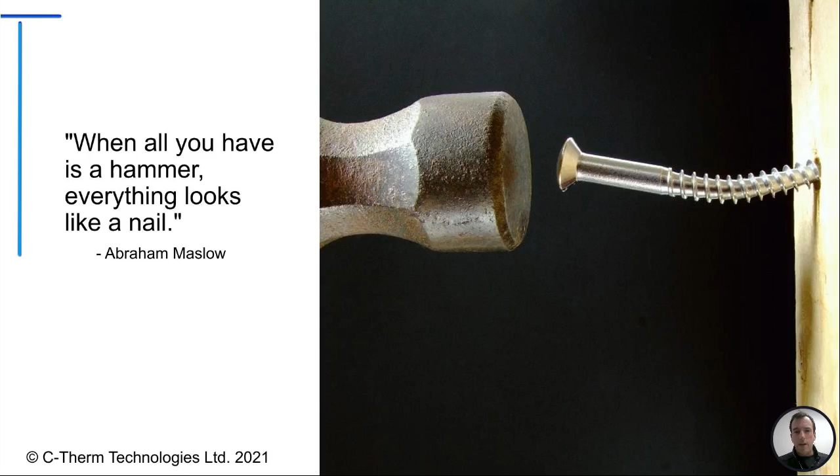There are a wide range of different materials: solids, liquids, powders, pastes, conductive materials, insulative materials, and different environments you might want to test under: high pressure, high humidity, radiated environments in the nuclear sector. And it's really important to have a variety of tools so you can have a tool that's appropriate for the job at hand. And with this, Trident brings those three different sensor types.

This slide just gives you a good idea of what the relative sizes are of the sensor. And what we're identifying here is the active area of the sensor. So this would be the area that would need to be covered by the sample material. On the top, you've got the needle probe, which has an active length to it of 150 millimeters, and that gets immersed into the media which you're looking to test.

This can be good for granular material if you're looking at soils or different granular geological material for site selection, perhaps for geothermal application. This can be a good tool for that particular type of application. We don't talk a lot about it in this content, but there are some interesting areas of applicability there related to soil testing. Also great for polymer melts and really sticky bonding materials that might damage the other sensors. It's our most robust sensor.

The middle one is the Flex TPS, and that has multiple size sensors. So that's one thing to note, is with the Flex TPS, you do get that variety of sensor sizes. Depending on the heterogeneity, the homogeneity of the material, what the application is, your evaluated volume of material, you might have some important considerations there. You might want a larger evaluated volume of material, proportional to your measurement. So with the Flex TPS, you have 6, 13, and 30 millimeter sensors provided as default with the Trident Flex TPS offering. So you get those 3 sensors in those sizes available with it.

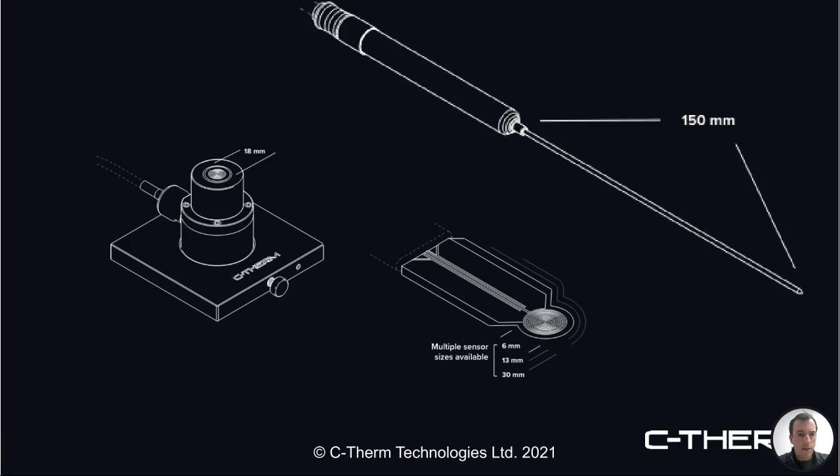With MTPS, this is used in, I would say, 75% of the application area. So it is the most popular sensor. It's the most sensitive, has the best precision, reproducibility, and accuracy in most situations. Being a single-sided sensor, it's really easy to operate. It's factory calibrated, plug and play. It makes for a really simple user experience. You'll see this used a lot. Because it's single-sided, you can thermally map different areas of a composite. So if you do have some difference in performance, perhaps some settling in a composite that you'd like to investigate, the MTPS is a great tool for looking at some of those particular issues.

These are some accessories available for the MTPS. So the top left, you see the powder test cell. Top right is the high pressure cell. We have a line of high pressure cells available for the MTPS. Lower left is the same cell that's used for powders, except in this case, it's being used for liquids. There is an O-ring that's on the bottom of that, makes it easy to test different liquids, very versatile. And then to the right is a great tool for dealing with any kind of compressible material.

Something you want to think about if your material is compressible is that any densification of a material will typically impact its effective thermal conductivity. So if you think of, for example, an insulating batting material, when it's nice and lofted, you've got a lot of interstitial air present in that. Air, when it's not moving, is a great insulator. It's around 0.023 watts per meter Kelvin. So this is a great means of lowering the conductivity, improving the R value or insulation quality of a material.

But you really want to make sure that you're testing that material with a representative level of compression. So depending on how compressed that material is going to be in the application, that's what you would want to represent and reproduce with the CTA pictured on the right. And that device just provides a really sensitive way of dialing that in reproducibly. It's a nicely designed compression test accessory.

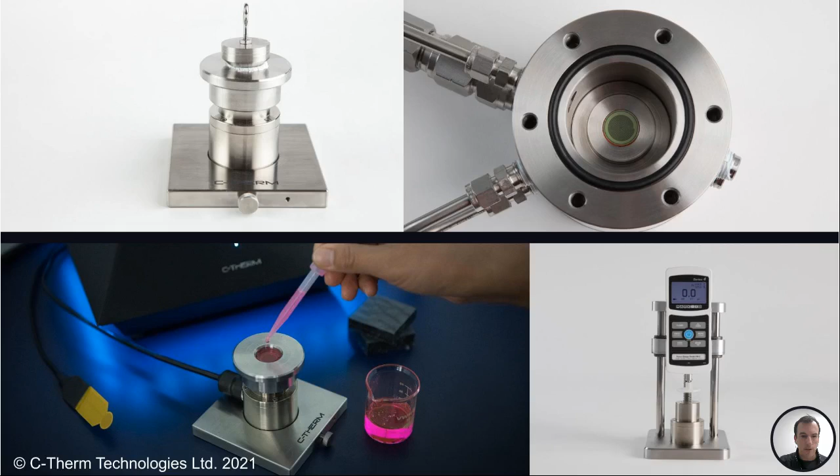With TPS, Flex TPS, we have a variety of other accessories and options. The TPS sample clamp is used in a lot of testing. It's one of the ways we negate the impact of contact resistance with testing with TPS.

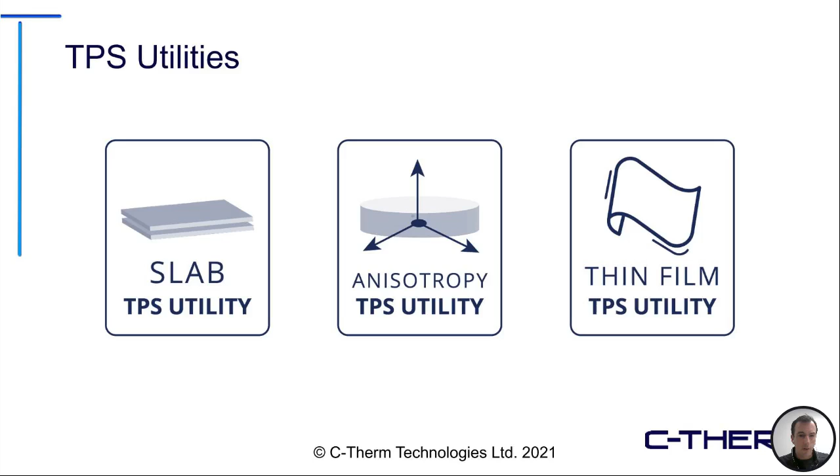There's a lot of information being presented here, and what we're trying to educate and advocate within this kind of space on is the pros and cons of these different techniques and methods. And so all the methods are good. They all have their merits. They all have their limitations as well. And what we really try to focus on is speaking and informing the audience on what those capabilities and limitations are. What are the particular applications where we recommend certain types of sensors and certain types of solutions?

This is all codified in the method selection guide that was produced a couple of years ago by folks from our team and external experts in thermal analysis. It's a comprehensive document. It's about 50 pages. And what it really does is explains thermal conductivity methods, not just the transient methods that we're focusing on today, but also including steady state techniques, such as guarded hot plate, and techniques that are most suitable for really high temperature ranges, like laser flash. If you've got to test at 1,000 degrees Celsius, then laser flash is a great solution for that.

But laser flash brings a lot of other requirements along with it, including the need for heat capacity, the thermal expansion of the material, etc. So it's really important to understand the points of theory that support the method, and what are the practical limitations of it when you go to measure different types of materials. Lots of methods can be adapted for different scenarios, but it doesn't mean that they're necessarily optimal for testing these different types of materials.

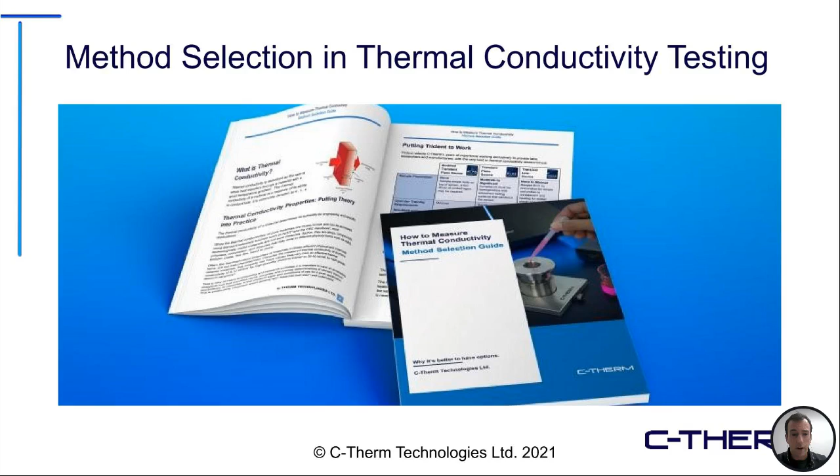I also want to just mention, I'm going to transition this over to Ari in just one or two more slides, but we've got a couple of cooperation partners that are a really strong part of what we do. We work closely with a couple of French organizations that are leaders in their respective fields.

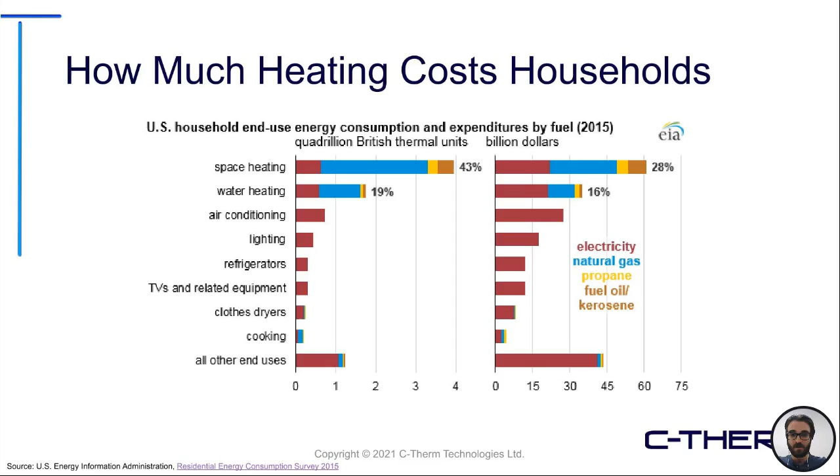One of the main driving factors behind a lot of these innovations is obviously related to the cost of heating and maintaining ideal living temperatures inside of these buildings and houses. You can see just from this example here, the sheer amount of energy that's required to maintain heating, whether that's the inside, your water, air conditioning. It's an extremely large amount of our resources, which translates to billions of dollars on a yearly basis to perform and maintain this cost.

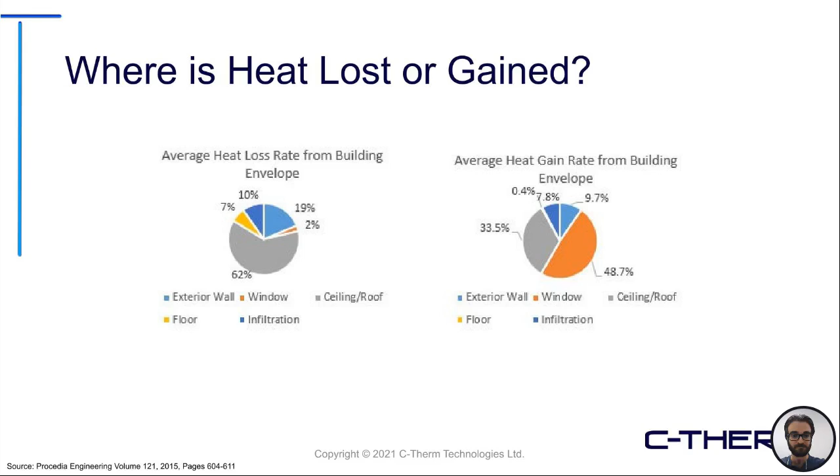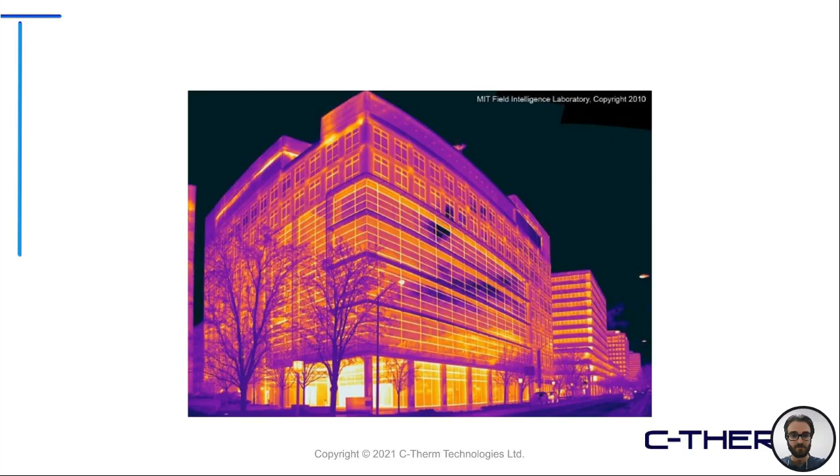Here we just see an IR image of a building. Obviously, noticing that there are quite a range of hot spots and cold spots throughout. This is related to the different areas of the building, height-wise, what material the building component is made out of, whether it's a structural, thicker material, a window. Buildings encompass quite a wide range of materials and components, so there's a lot of factors to consider here.

But all of this is going to be coming back and relating to thermal conductivity. This is what we're going to be exclusively focusing on during our presentation here today. Obviously, there's a lot of aspects to an ideal building material that need to be considered, whether that's the structural, mechanical properties of that sample, how efficient that material is. Cost is obviously a big factor, but with respect to efficiency and the temperature maintenance capabilities, this is where we're going to draw thermal conductivity information from.

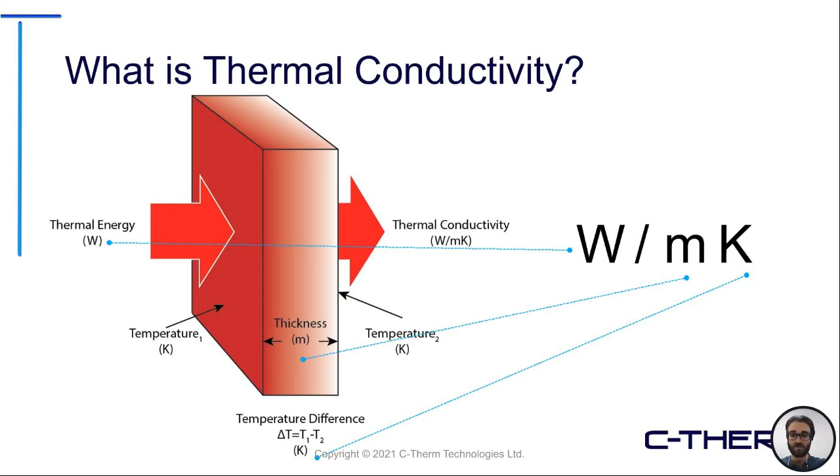So just breaking it down here, for those who may not be familiar, thermal conductivity can be seen as essentially the amount of thermal energy, so watts, traveling through a given material thickness, so meters, across a temperature gradient K. So thermal conductivity can be reported in watts per meter Kelvin, and this is what we will be going over and discussing today.

So as I mentioned earlier, buildings can encompass quite a range of structural components and different material types. Whether it's residential or industrial buildings, they all carry a similar overall format. Obviously, you have your base. These can include different types of foundations or slabs. There's the structural backbone or the skeleton, whether that's made out of metal beams or wood, depending on the type of building. And then you have your exterior, the extremities, so the roofing, the walls, flooring. Inside of all that, there's insulation. So a lot of different components to consider here, and again, a wide range of materials.

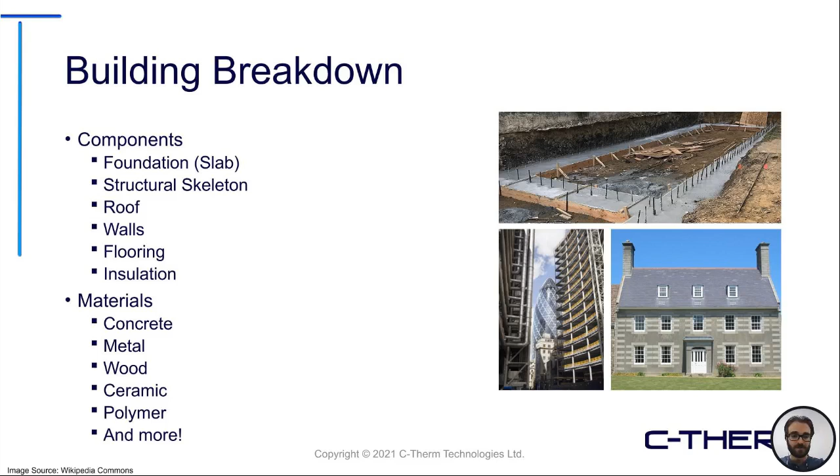You can have porous concretes, you can have dense metals, woods, ceramics, polymers. Really, building materials are a very hard application space to group into one little box; they incorporate quite a range of material types. And because of that, the focus in the coming slides will be a lot of different case highlights and applications, looking at how thermal conductivity is being used to help improve or quantify the effect for the different material components and structural aspects of the buildings.

So with that, we'll start jumping into some specific case highlights. First off, we will be looking at some studies that involved using the modified transient plane source, or MTPS sensor, for the thermal characterization. Touching on it just a little bit from what Adam had said earlier, the MTPS is the single-sided sensor, really easiest to operate and use, and offers some of the widest versatility with respect to the samples you can test: high conductivity, low conductivity, solids, liquids, powders, pastes.

Really incorporates a vast range of samples. And the other thing, and this can be really influential for the building materials as well, is taking a look at being able to test in those representative conditions, whether the building or the environment that the structure is in, whether it's a warm climate, cool climate, underground, above ground. These can all be factors that should be considered.

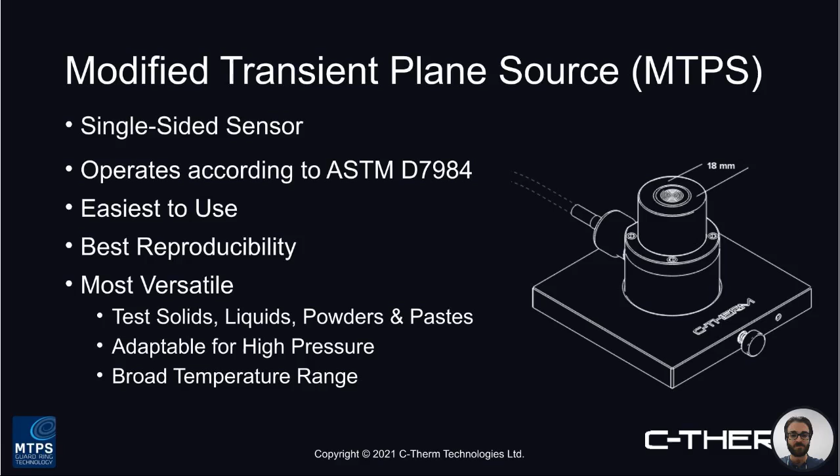And when you're going to test the thermal performance of those materials, really being able to mimic those conditions is going to be crucial to getting the best overall understanding of how that material will end up performing in its end use scenario.

So starting out, we have a study that was done on thermal parameters of roofing slates from the Czech Republic. So in this study, we'll take a look at researchers that were aiming to investigate the effect of different natural mineral sources as roofing slates, or the material that's incorporated in the roofs. You can see on the right there the areas where the minerals were extracted from. So obviously different locations, different mineral compositions will all lead to different thermal performances.

And in this study, the researchers were interested in examining both in-plane and through-plane thermal properties, as well as seeing how the overall parameters were influenced by the effect of temperature. Some more notes from the study: the mineral composition was measured by XRD, but the thermal properties were all measured using C-Therm's MTPS sensor.

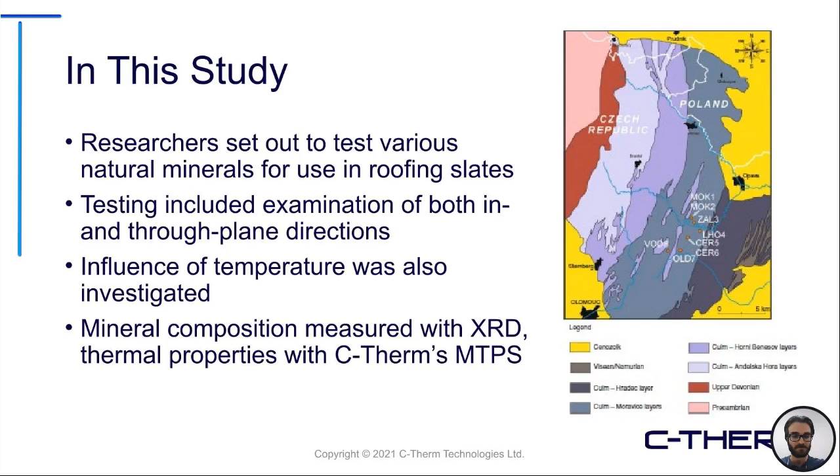So you can see here from the thermal conductivity results, they noted both the parallel or in-plane and perpendicular through-plane directions. And across all the various mineral sources, we did see, generally speaking, the parallel or in-plane did result in a higher thermal conductivity measurement compared to the through-plane direction.

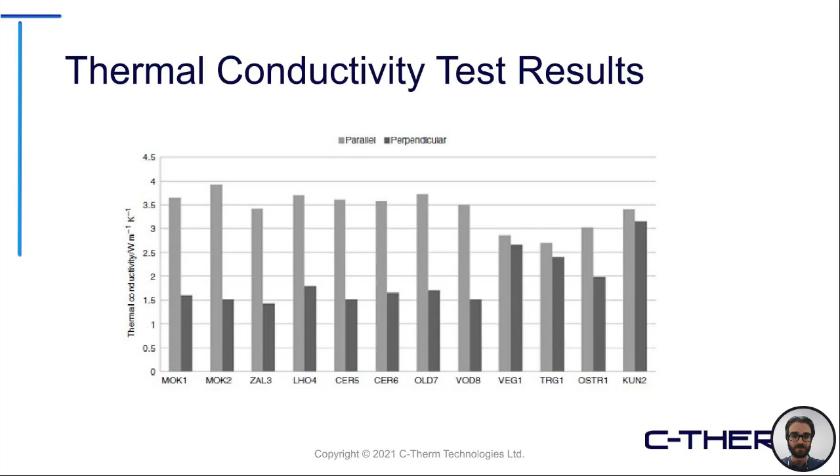Now, obviously, this is specific to the subsection of mineral materials that they were looking at, but it is interesting, and something worth noting, that some materials can have significantly different thermal properties and thermal performance in different directions. So this can have bearing on how you're aligning the materials during the construction, how they're incorporated into the materials, if it's an additive. All of this can come into play when evaluating the overall material performance.

So whether the roofs were in a shaded area or exposed to the open sun in non-shaded areas, these different materials can have different performances based on the temperature that you're subjecting them to, which will in turn influence their insulative performance as a roofing material.

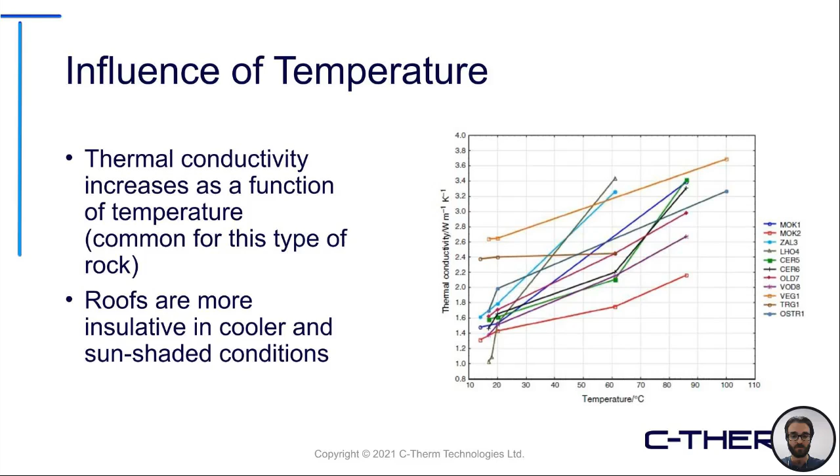Up next, this study, an experimental study on the thermal performance of phase change materials and wood plastic composites for building roofs. So again, we're looking at an application for roofing materials, but in this study we're touching on some of the next generation advancements in these classical building materials, incorporating the use of a phase change material. So you may have seen phase change materials mentioned if you've ever seen talks on thermal management in batteries and various technological devices. But we're seeing here phase change materials being included in building materials as well.

So in this study, they were aiming to add the PCM to the composite for their roofing applications. And the reason behind this is the phase change material will generally improve the temperature stability of a system when the thermal input is delivered to the sample that contains the PCM. That material will undergo what's known as a phase change, changing from either solid to liquid or liquid to solid, depending on the direction of that temperature gradient. And this can act almost as a buffer, enabling stability in the temperature change for the overall material.

Now, thermal conductivity data from this study was actually used by the group for some computational simulations. This is another big area where you can do some initial testing of the various materials, get your input parameters, and then instead of needing to build an entire structure and do the in situ testing, taking that data and running computational simulations is a way to get around going all the way to that end product, and can really be used to tailor and fine tune your parameters before moving on.

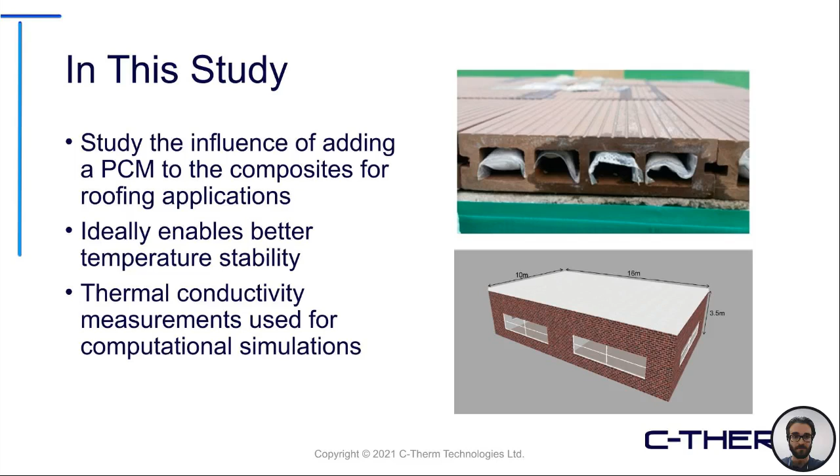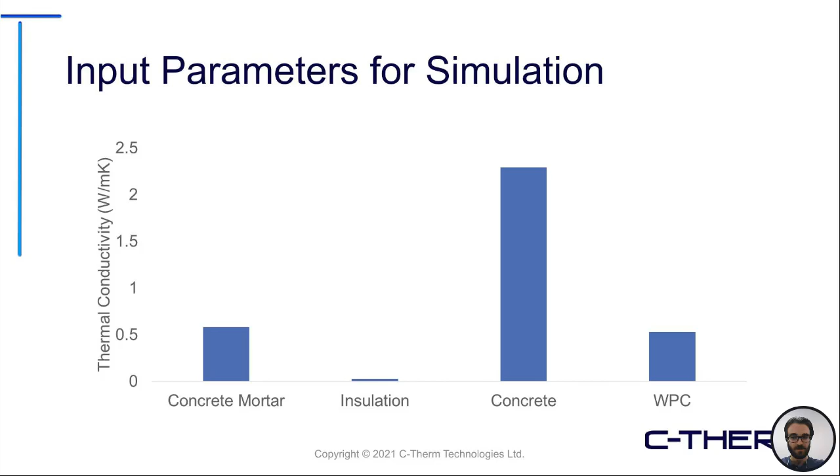So they had some material measurements with the MTPS, others were just reference values directly inputted, but you can see there's different materials that were incorporated in their study, some concrete, insulation, and then the different polymer-based phase change materials, all seeing quite a range of different thermal conductivities. And this is what they were using for inputting into their simulation study.

And what they're aiming to do is see the influence of the material with and without the phase change material and with different phase change materials on how well it would be able to handle a direct input of solar radiation, or essentially the delivery of that thermal input.

So we can see in general here, the overall temperature rise in the sample as a response to that radiation was generally seen to be higher in the samples that contained no PCM, and overall were somewhat lower with the various PCMs added. And again, this is what we would expect to see. The PCM is coming in there as a stability device, aiming to reduce the overall increase that was observed in the wood plastic composite.

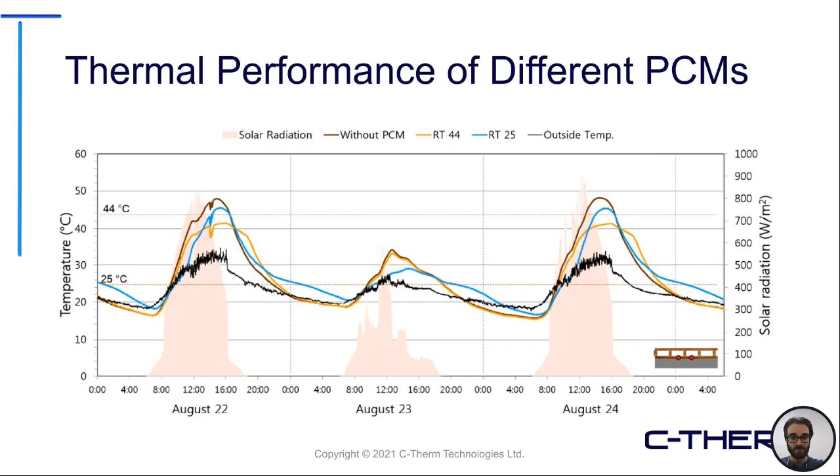With that, they're able to do some studies on the overall energy consumption that would have been used. Again, kind of tying back to one of the main purposes behind some of these studies, coming back to the energy consumption and the cost of living to maintain.

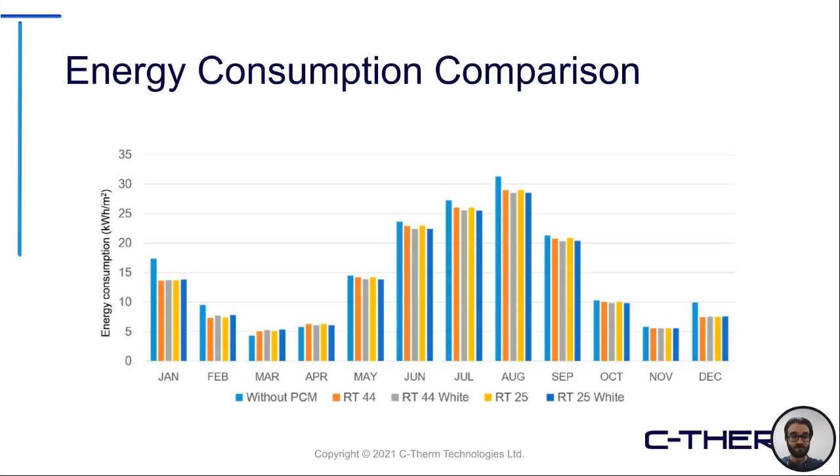Overall, what they were able to show is without the PCM, generally energy consumption was higher. There were a few divergences from that trend, but generally speaking, across the data set, it was noted that the introduction of a PCM did have a beneficial result on not only the stability and the temperature increase, but the overall energy consumption that was used.

Up next, this is taking a little pivot away from roofing materials, but taking a look more so at the introduction of a silica aerogel used as thermal insulation coating. So the introduction of aerogel materials has been something seen throughout a few different sectors as well. The ability of an aerogel as an insulating or reducing agent that is able to block the transfer of heat is something that's built up in popularity over the last few years, and we've started to see that across a broad range of applications.

So in this study in particular, they were noting heat loss in the winter and gain in the summer can be significant. And again, coming back to one of those first slides, especially in those rooftop materials, but also in walls, various structural components of a building. Heat loss is something that will affect different components differently, but it is there regardless. So they were aiming to add this porous insulative material to the building in hopes to reduce the overall thermal conductivity of the build and therefore increase the insulative performance.

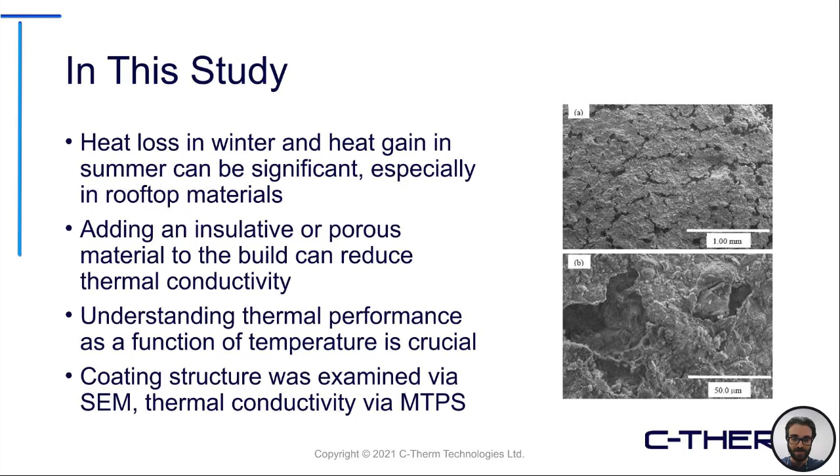In this study as well, it was really important that they understood the thermal performance as a function of temperature. And they were also examining these materials using the MTPS, but we can see some of the SEM images that they were taking to view the structural aspects of their coating on the right here. So we can see that the aerogel coating added this layer on top of the substrate that they were looking to measure.

Ultimately, what they were able to show is that the pure binder material without the incorporation of any aerogel had the highest thermal conductivity at room temperature. And through the addition of a 1-to-1 and then a 1-to-4 ratio of binder to aerogel, they were able to show an overall net decrease in the effective measurement for the thermal conductivity.

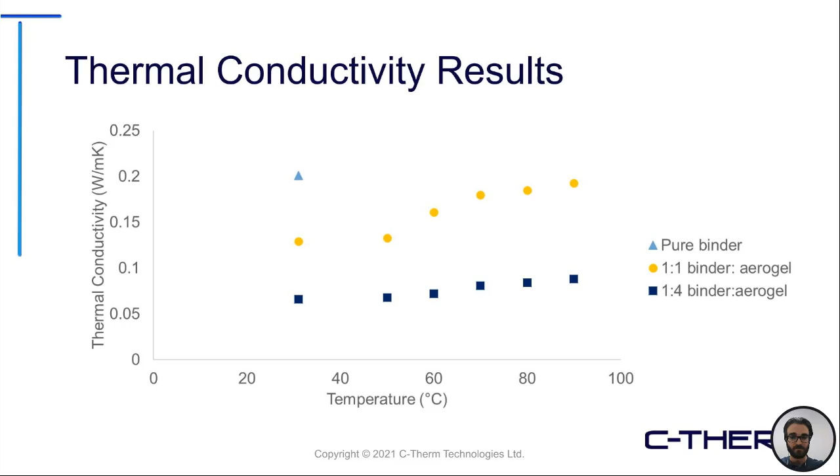Now, on top of that, when investigating the influence of temperature, this trend held true across the different temperature points of interest. As we can see, the sample noted with the dark blue squares had the higher concentration of the aerogel material and overall the lowest thermal conductivity measurement compared to the other material. So this is an example of how you can incorporate some of these materials into the overall build to, in this case, decrease the effective measurement.

Next up, looking at a preparation of energy-efficient paraffinic PCMs, expanded vermiculite and perlite composites for energy saving in buildings. So in this study, they had the understanding that the PCM was going to improve the overall thermal performance, improving the stability of that material, but they were investigating instead the matrix that the PCM was added to and how that can come into combination with the introduction of the PCM, how they play off each other, and which materials may be better suited as the overall building structure when you're looking to add some of these materials on top.

So in this study, they were adding the PCM to two different matrices, as mentioned, perlite and vermiculite samples. Both of those materials were used in a structural transformation and they can undergo various modifications that are temperature dependent. So subjecting them to various temperature conditions can result in different effects related to not only the stability of the material, but in this case, how much they would expand by. So their main goal was investigating the influence of the PCM on the surrounding matrix.

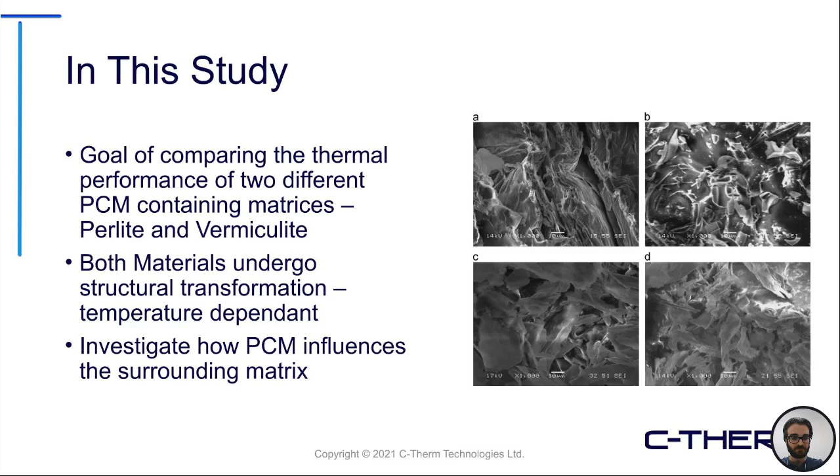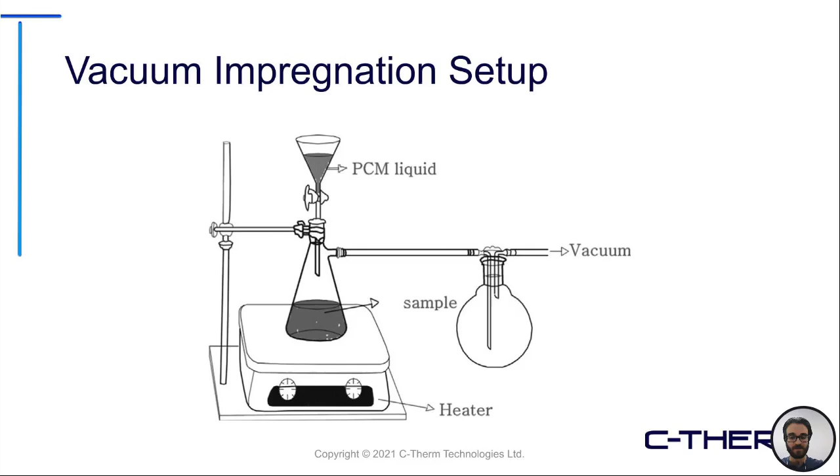The way they actually added the PCM, this is just a quick little diagram here of how this was done, but it was through a vacuum impregnation setup. Basically, the PCM was added to that sample through this vacuum setup here. So the material was coated and loaded into the various samples.

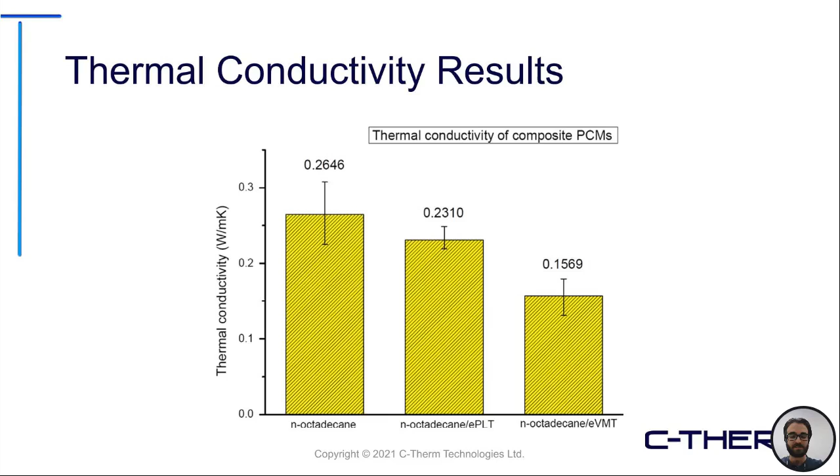So this can give you an idea that if you are looking to add or modify any of your base samples or base materials, it's important to, one, understand what the additive is going to do, but also how it's going to interact and play off the base material that you're looking to use in the first place.

Up next, taking a look at thermal and acoustic insulation boards from a microalgae biomass. Now in this application here and the one following, one thing with building materials is obviously you're looking for highly efficient materials, structurally stable, but there is a field of adding eco-friendly, or green chemistry, approaches to improving the thermal performance or the efficiency of those materials in an environmentally friendly way. So this is something that's, again, popped up across multiple sectors. And we'll take a look at some of those applications here in the building material space.

So in this study, one of the main reasons for the group's investigation is these foam boards were traditionally made from petroleum-based materials. Obviously, petroleum is a massive industry, and a lot of those byproducts are used for a lot of our common plastics and different materials used in everyday life. These researchers are aiming to use a more eco-friendly approach to get the same quality insulation from these boards, and they were investigating a few different sources.

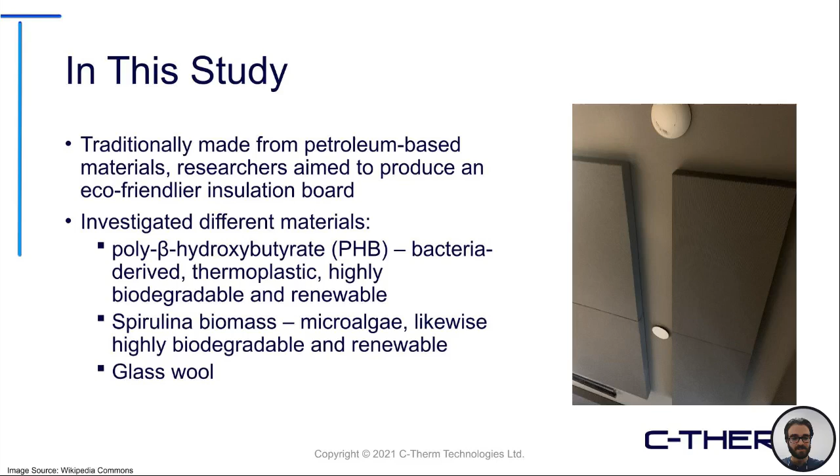So first is a poly-beta-hydroxybutyrate, or PHB, source. This is a bacteria-derived material, highly biodegradable, renewable, so it has that eco-friendly aspect to it. Next was a spirulina biomass. Again, this is a microalgae-based material, similarly highly biodegradable and renewable. And then something a little more traditional, which is a glass wool.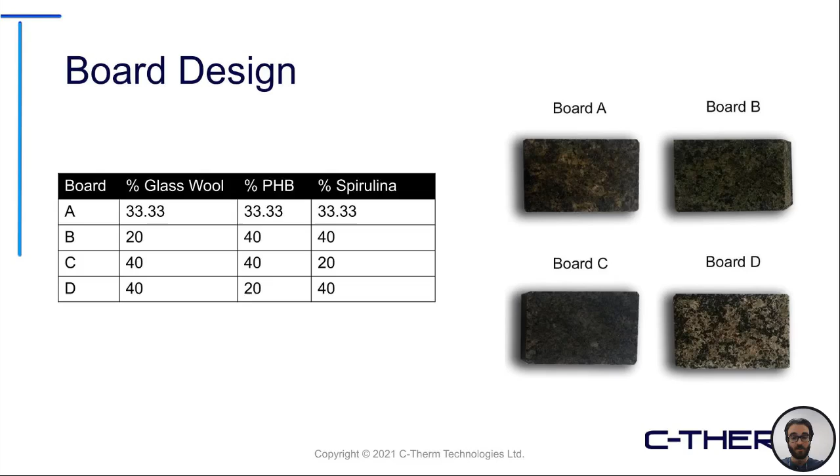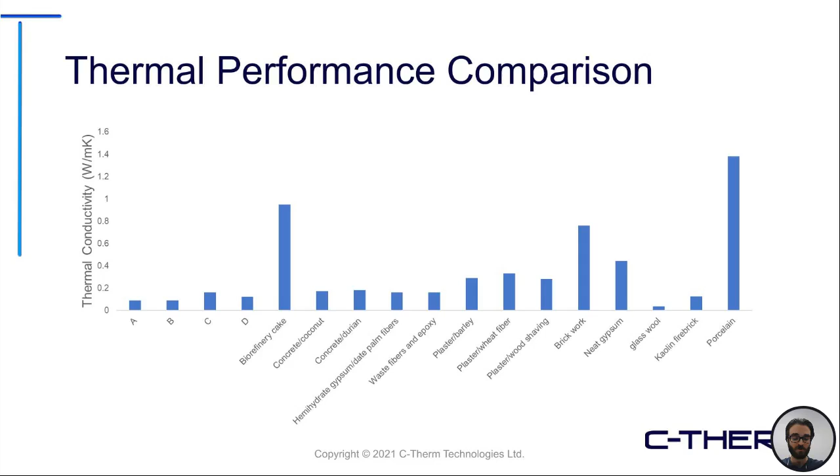So you can imagine cultivating various fruits and vegetables. A lot of the skins, the fibers, things that aren't edible would simply be discarded and tossed off to the side. This adds to your waste cost. But if there's a way to recycle those, bring them into other processes and add them in different materials, not only are you saving on overall cost, but it can be a more eco-friendly alternative with similar performance if you're able to control those parameters properly.

And this last one here, comparative study on different biomass from olive grove in the manufacturing of sustainable ceramic lightweight bricks. So in this study, the researchers were aiming to add a material to their brick compound. Bricks have been used for a very, very long time in building material in these types of applications. The idea here is by adding this additive, one, it's going to reduce the overall amount of that pure material you need to build the brick, but by incorporating that recycled sample, it should be an eco-friendly alternative, as well as decrease your overall cost.

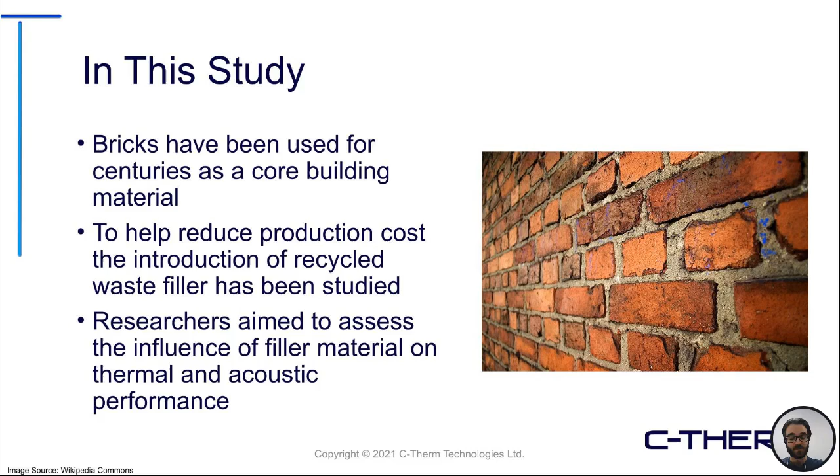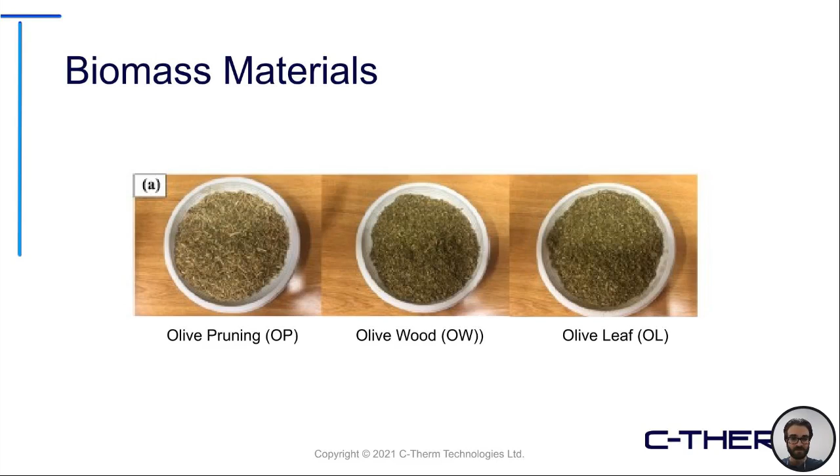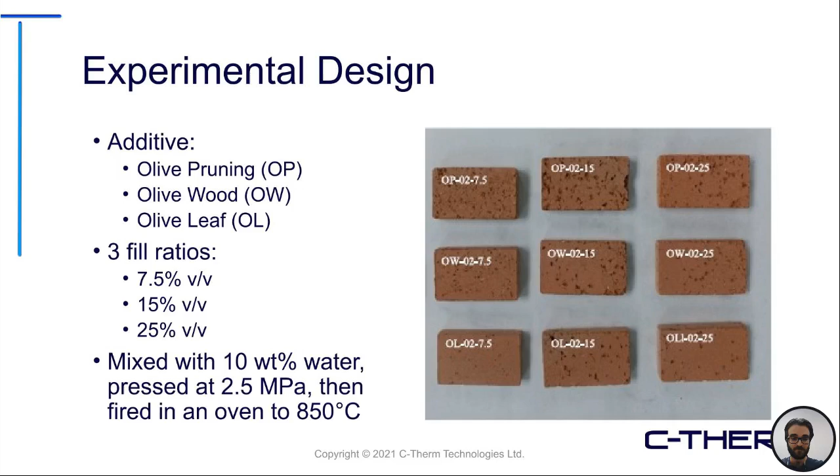So they were looking to study the influence of different materials for both their thermal and acoustic behavior. So the biomass that was used in this case is various olive waste products. So there's the pruning, wood, and leaf. So these 3 different materials, all from the same overall olive sample, were used as different filler materials. So they not only investigated the 3 different materials, but also studied the effect of adding them in different fill ratios. So the brick material with the filler was mixed, compressed, and then fired, and this is how the overall sample was made.

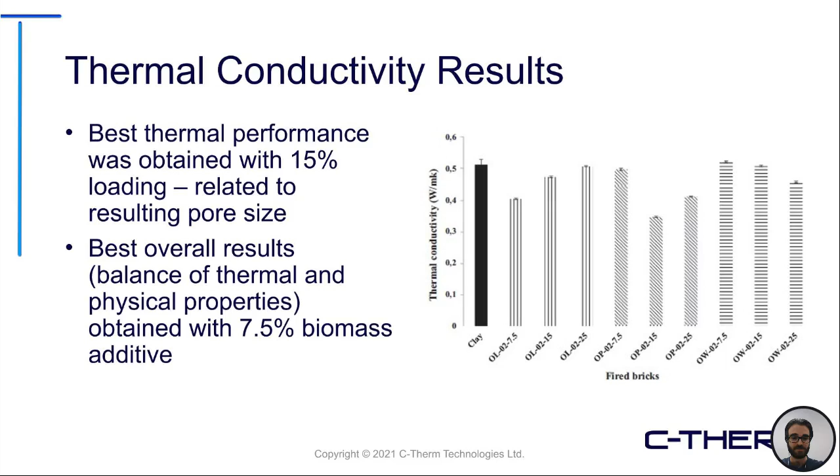And then through the study of the thermal conductivity, they were able to hone in on the best performing thermal sample. So this was obtained with a 15% loading. And they found that related to the ideal pore size that was generated during the firing process of that brick. But even though that 15% loading resulted in the best overall thermal performance, when taking in other considerations such as the physical and the acoustic properties of that sample, the overall best performing sample was the 7.5% additive. So this is a scenario where even though one sample did result in the best overall thermal response, structurally and through some other property considerations, it wasn't the overall best choice. So again, thermal conductivity is one aspect, and it's a very important aspect that needs to be studied. But there are other properties and characteristics that need to be taken into consideration when looking at the overall picture.

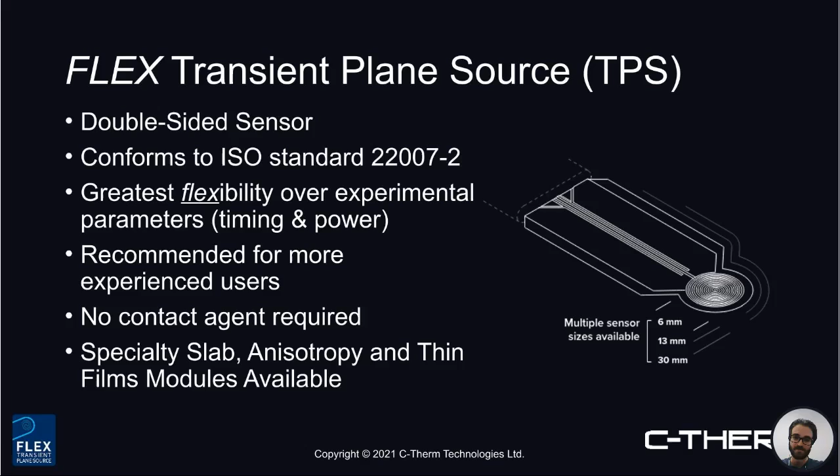So that was a lot on the MTPS, and again, kind of highlighting the fact that it does cover quite a range of materials. Up next, I have a few slides looking at some applications and highlights using the Flex TPS, or the transient plane source. Again, just to kind of freshen the mind there, the TPS is that double-sided sensor. It is a flexible sensor. It is a little bit more, what we say, for advanced users; it requires a little bit more understanding of how to adequately set up your test. You have to manually set your timing, power parameters, and things like this. But ultimately, it is a great option for some materials as it does not require a contact agent. And this is what we'll be highlighting here in these coming slides, as well as it does conform to the ISO standard, so ISO 22007-2.

So one of the main ones, and the first one we'll highlight, is the application of concretes and cements. So with any type of hygroscopic material, so something that will absorb water, this is best tested via TPS. So with the MTPS sensor, certain materials such as polymer, ceramic, metal-based materials will require the use of a contact agent. And in the case where those aren't compatible with the overall sample type, this is where the TPS comes in to provide that complementary aspect to your testing needs. Again, here when we're looking at cements being relatively heavy and very rough samples, the flexible sensor design mitigates any potential risk to the sensor. And while it is a slightly more advanced method to operate, it's still vastly superior in respect to the versatility and speed compared to some of those other steady state methods that may be available.

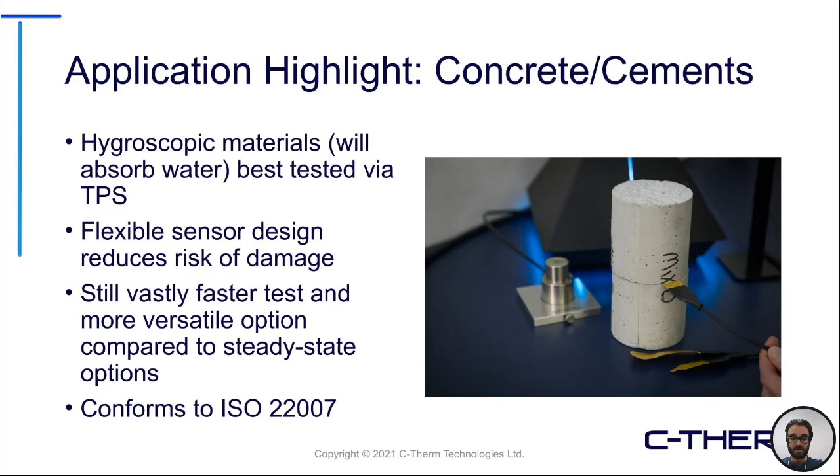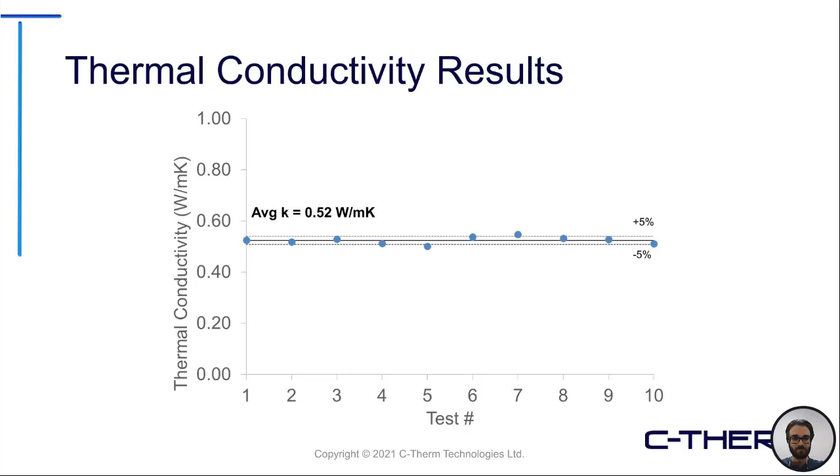So this is just a quick example. We can show that measuring this cement across 10 measurements, we get a very nice tight measurement spread, average thermal conductivity coming out to about 0.52 watts per meter Kelvin. But really this is an example here of the material type that you're looking to test really being most appropriate for the TPS sensor.

And this last highlight here, this was some testing that was done internally on some foamed glass gravel from a company called Glavel. Now this type of sample really represents one of those innovative materials in that next generation being seen in building applications. The sample is a lightweight, highly durable and thermally insulative material that can be used in various aspects of building, whether it's for sub-slab, backfill, or rooftop fill applications.

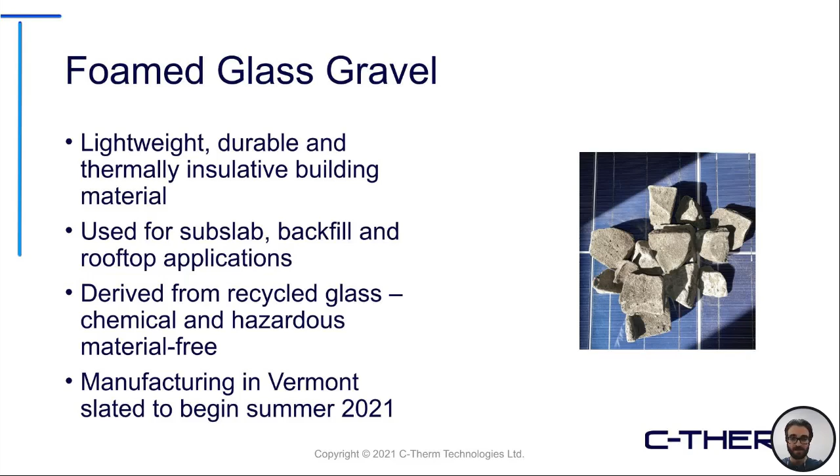The structural stability of this sample, along with its light weight, really add some interesting properties that can be accommodated in quite a few application spaces. Again, it's derived from recycled glass, so it has that eco-friendly aspect, chemical hazard material free. And as a note, they are beginning manufacturing in their Vermont location this coming summer. So for anyone in North America, this is something that can be obtained relatively locally.

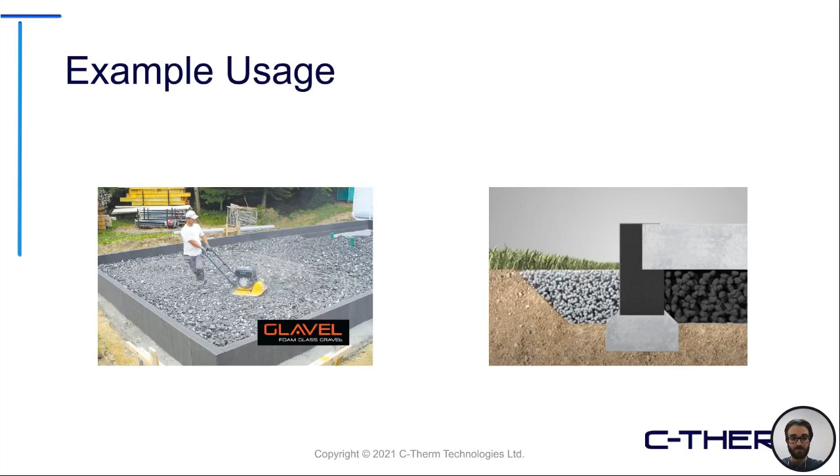So we can see some example usage here. Typically, these sub-slab applications require the use of a filled cement or other materials, but this very lightweight material can simply be added in and compacted down to create that bed. On the right image, we can see it can be used as a filler material where it's eco-friendly. There's no harm to the environment or risk to the surrounding structural aspects of the base. So again, just a really nice option that can be added in for these different application types.

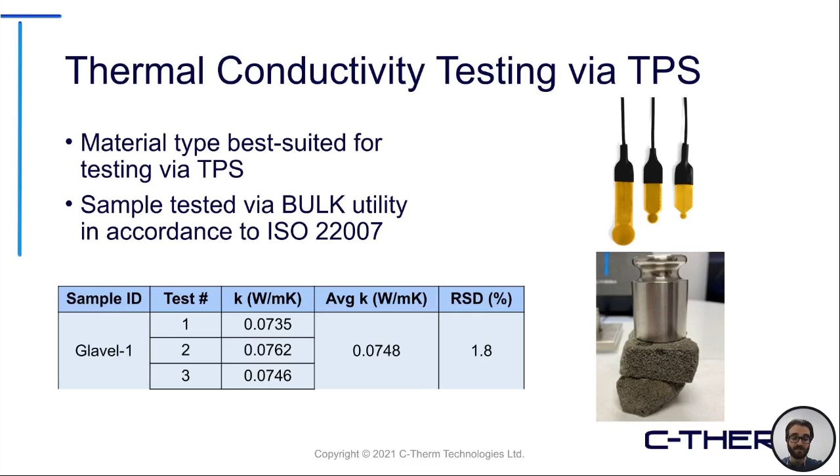So this sample, like I said, is really tested best via the TPS method, related to the fact that it is a porous material that would have otherwise absorbed the contact agent for MTPS. So a really great option for TPS. We can see here 3 repeat measurements coming in at an average reported value of about 0.07 watts per meter Kelvin, again indicating a really nice insulative material. And the added aspect of being lightweight and durable really makes it a great option for these building materials.

So that comes to the end of some of the case highlights we wanted to touch on today.